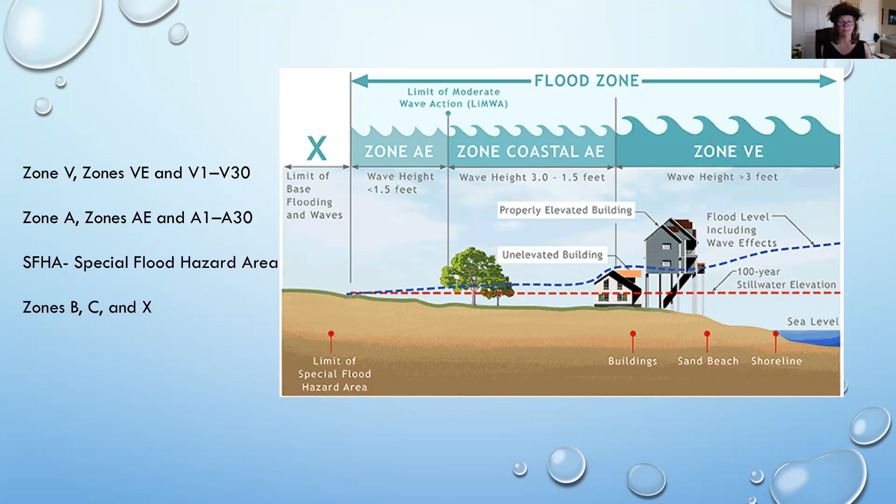So the flood insurance study is rather confusing. So they come into the community, and this is FEMA coming in, and they work with the local government, and they determine what flood hazards are for an area. They do an engineering study, and the FIS study shows the shallow flood areas, the flood hazard areas along the rivers, streams, coasts, and lakes.

It's based on a different amount of information, and that includes historic information such as the river flow, the storm tide, and the rainfall data. It includes meteorological data, topographic data, hydrologic data, hydraulic data. Hydrologic data is the actual stream flow. Hydraulic is how high it gets. It looks at the open space conditions, how the water flows across open areas, any flood control works like levees, and of course the development in the area.

And so of course this has to be updated over time. The results are shown on the FEMA flood map called the Flood Insurance Rate Maps, or FIRMs. And the FIRMs are available through the FEMA web service.

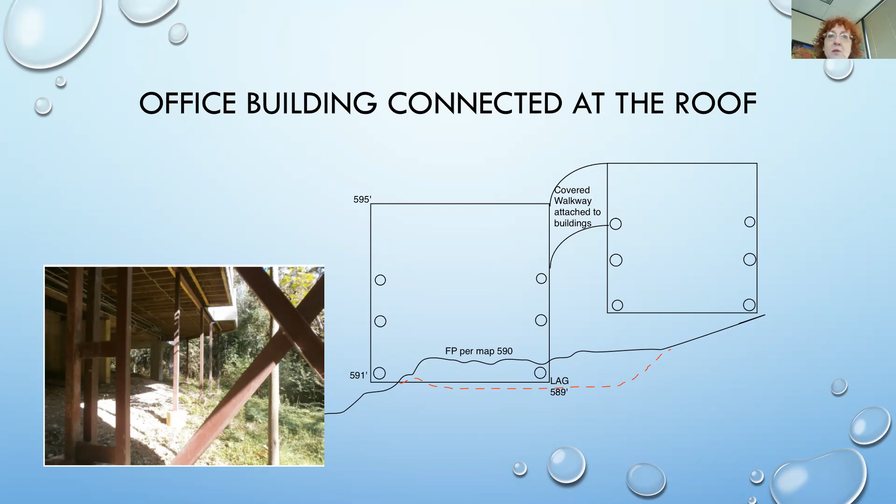So the NFIP originally started out with the Flood Disaster Protection Act of 1973, and then the NFIP came in 94. It mandates that federally regulated, supervised, or insured financial institutions and federal agency lenders must require flood insurance for buildings located in a participating NFIP community and in an SFHA, which is the Special Flood Hazard Area. Some of them may still require flood insurance outside of the Special Flood Hazard Area just for their own risk management.

So which types of buildings may be insured against flood loss? It can be written on any building that is eligible for coverage with 2 or more rigid outside walls and a fully secured roof.

And so the buildings have to resist flotation, so they probably need to be on a slab or on pier and beam. They need to be resistant to collapse and lateral movement. Manufactured homes, even travel trailers without wheels, can also be covered as long as they are on an FHA approved permanent foundation.

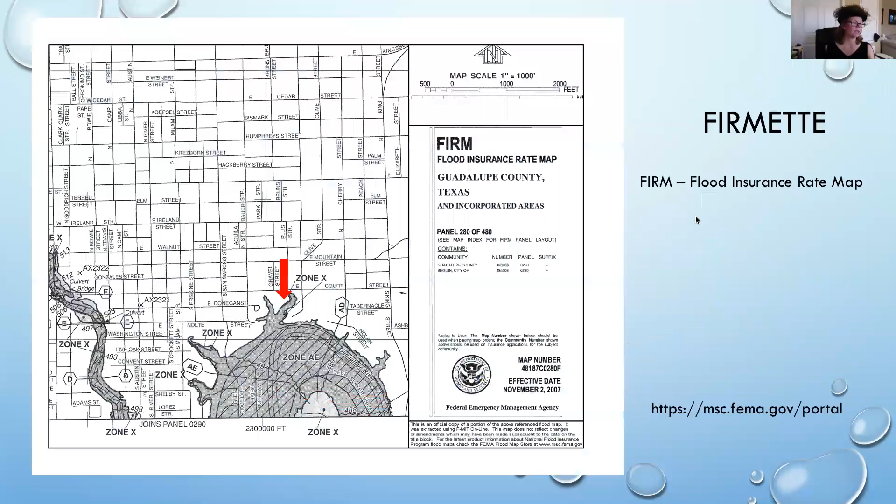So back to our building, we immediately filed for a letter of map amendment, the LOMA. On a LOMA, there's no filing fee, and it takes between 45-60 days for your determination. When I had called FEMA, the intake assistant asked for the number in B9, this number right here, the 490.5. And then he asked for the number in C2A, the 505.30. And he said, okay, piece of cake. It's 15 feet above the floodplain. No problem.

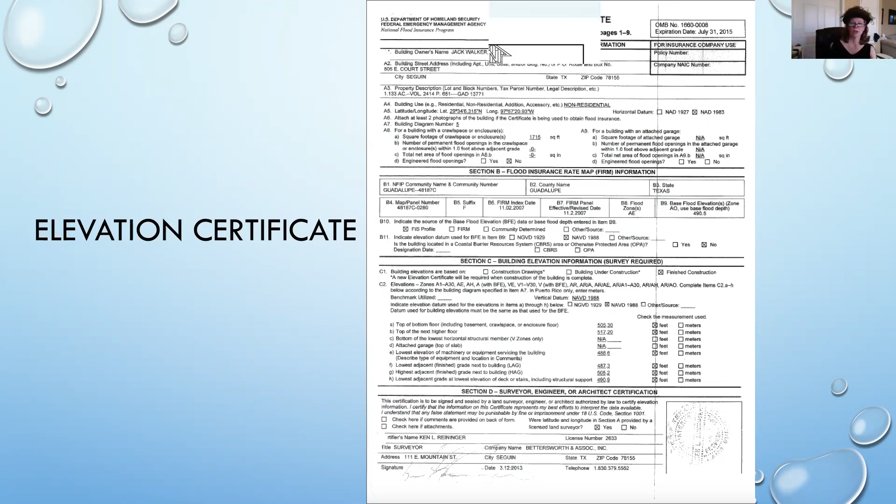So I was planning to file the letter of map amendment. A letter of map amendment is when the applicant and insured believes that the requirement to purchase flood insurance was made in error, and there is evidence that the building is not in the special flood hazard area on the effective flood insurance rate map, the applicant may apply for a letter of map amendment. Then there would be no flood insurance requirement. And in my case, my client wanted to avoid the flood zone stigma on his building.

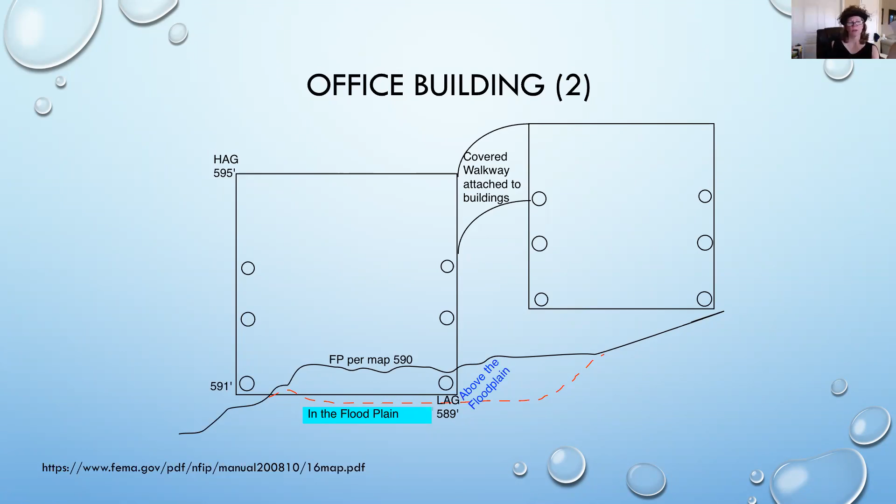Peggy, I'm going to pop in with a question or two. So you said that you had to send all of this information to Virginia. There are no state offices for this? It all has to go to the national FEMA office in Virginia? That's correct, because that's where the mapping office is, and all of these are asking them to change their mapping. How long did it take them to review your application? They were right at just under 60 days.

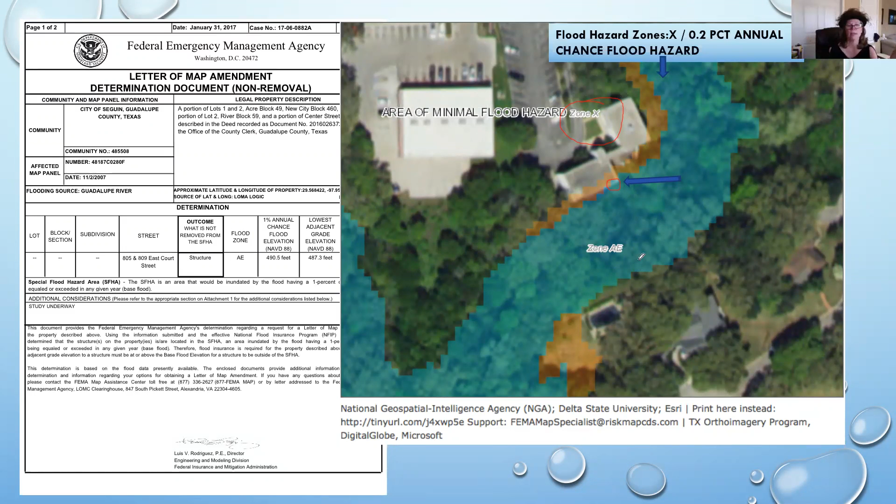It's actually, I'm sorry, LOMR F. So the LOMA is basically your application for a map change stating that the existing structure just simply is not in the floodplain. The CLOMA is your application for change based on the building that is going to be built, so it's conditional. It's going to be built and it's not in the floodplain.

The LOMR F says that it has been elevated by fill and it is not in the floodplain. And then the conditional LOMR F means that the building is going to be built with fill and is not going to be in the floodplain.

So what are we going to do about this? This is basically the FEMA map now showing this property, and they show our LOMA application right here. And with further research, you would find that determination letter telling us that there is no change, that it is clearly in the floodplain.

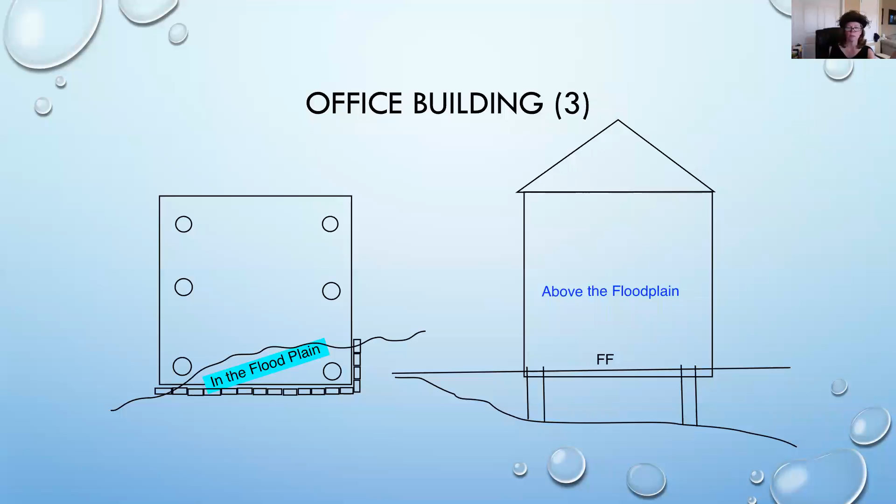Just to go over these again, the LOMC is the letter that reflects an official revision, and there are different types of LOMCs. So there's the letter of map amendment. It's issued when the scale of the FIRM does not allow for the small areas of naturally high ground to be shown outside of the special flood hazard area. So in other words, FEMA got it wrong. They did not account for variations in topography and that the building was not actually in the floodplain.

The conditional letter of map amendment means that it's not going to be elevated by fill, but that after construction, it still would not be in the base flood elevation area, so it would not be in the floodplain. Then there's the letter of map revision based on fill. And this is similar to the LOMA, but instead of it being based on natural ground elevations, the property or structure has been elevated by fill in order to elevate it above the base flood elevation.

Then the conditional letter of map revision based on fill is a comment letter from FEMA stating that the parcel of land or proposed structure that will be elevated by fill and upon construction would not be in the BFE. And so the parcel, or the proposed structure, is going to be built outside of that. And then there's the LOMA, which I just went over, and then a conditional letter of map revision, the CLOMR. So just remember, conditional means it's going to be built, and the F means that it's got filled.

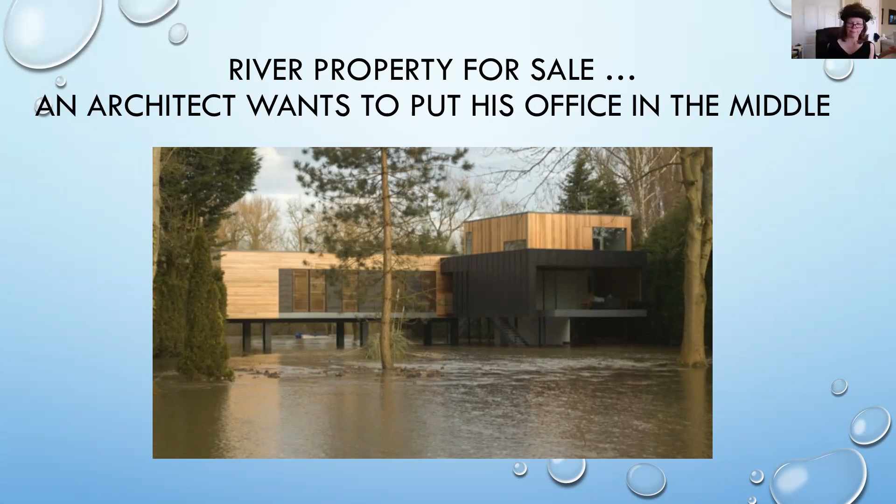So when I was learning about this, it's called the big elephant in the room, and it kind of stuck with me because this is very complicated. This diagram is used to illustrate the proposed structure, this building over here, to be built above the flood elevation. Each pillar is going to have to be measured to the direction of the water flow for the total square foot obstruction in the flow path of the flood event.

And FEMA requires a buffer of 1 foot above for the effects to downstream flooding. So if they say that the base flood elevation is, say, 600, you're going to have to go to 601. It must be 1 foot above, and the reason why is because if the water got squeezed up, it would have to show that it could go at least 1 foot above the base flood elevation for them to approve the application. Now, where did they get the 1 foot? That's kind of been one of my questions. It's not exactly arbitrary, but that's where they have determined is the safest zone for new structures.

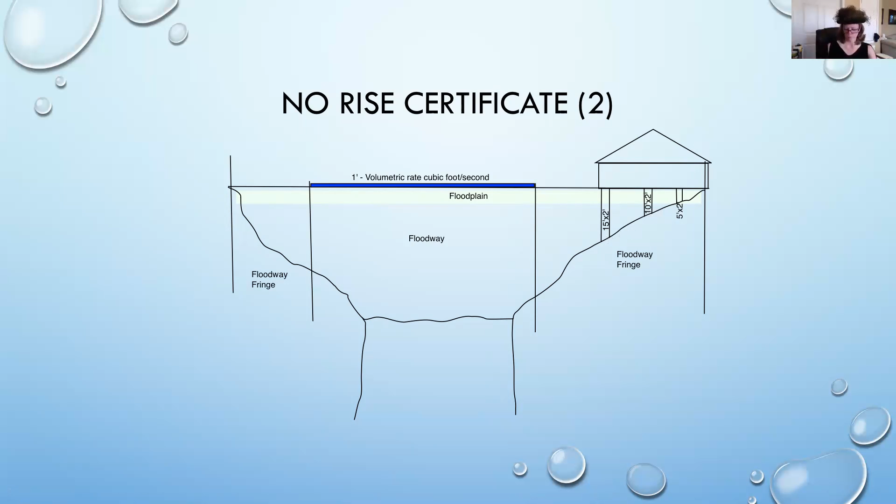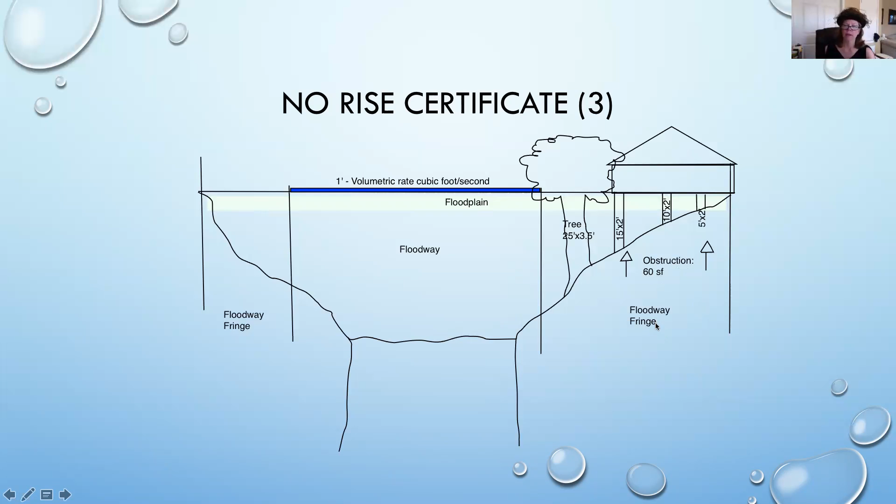So now imagine that there is a naturally occurring obstruction, such as a tree or multiple trees, that are also in the floodway or the floodway fringe. In order to receive the no-rise certificate, FEMA requires mitigation of the increase in obstruction to the water flow during the flood event. In our case, our obstruction takes up 60 square feet. They're in the floodway fringe, so not in the floodway, but in the potential for where flooding could occur. And for purposes of our demonstration, the tree is 25 feet tall by 3.5 feet in diameter, so it is a total of 87.5 square feet.

And just so that y'all have some definitions, BFE again is base flood elevation. The finished floor level is the top of the bottom floor, and that's often on diagrams as FF or FFL. And FEMA requires the base flood elevation plus 1 foot to the finished floor level. Going to go back to this.

Okay, so what they're saying is that if we are going to build these pilings and create an obstruction to the water flow, something else must be removed that was already there inhibiting water flow. So the tree could be cut down, and that would mitigate the new obstruction from the pilings on the building. I guess that can happen anywhere but Austin. And I don't know what you would take out if you can't take out a tree, but there could be other things already there that could be removed and offset the new pilings. If you don't receive the no-rise certificate, I think you're going to have real problems building, because you won't be able to get your permit.

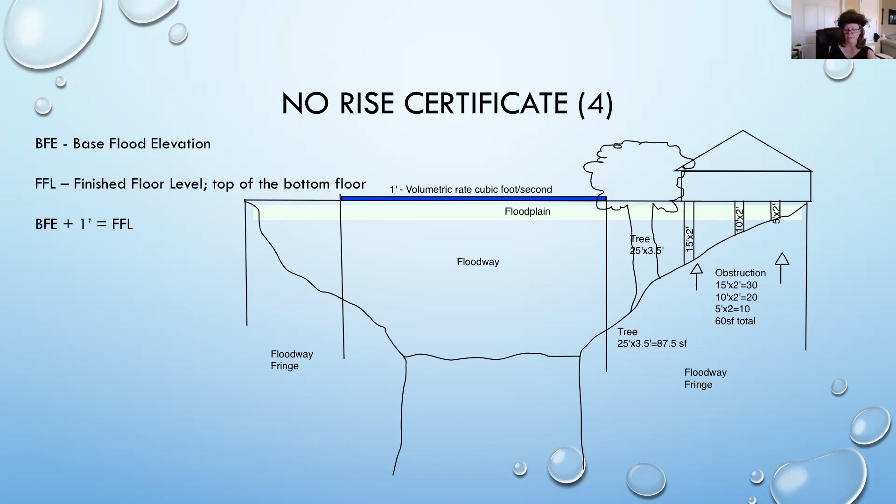So on the flood study methods, this came about when we were talking about a developer who wanted to build a subdivision, and part of the tract was mapped to be in the floodplain. During his due diligence on his contract, the developer believed the map might have been in error. The portion of the FEMA maps in the floodplain seemed incorrect, but he couldn't prove it. That would mean if he built houses in the floodplain, he couldn't sell them, because the new owner would have to get flood insurance to buy them.

So these areas are really just determined by using statistical analysis and records of river flow, storm tides, erosion, wave heights, and rainfall, and other information that they've obtained through consultation with the community, including floodplain topographic surveys and other types of coastal hydrologic and hydraulic analysis. However, on a smaller lot, they could be off by a few feet, which would mean the difference between being able to develop the land and not.

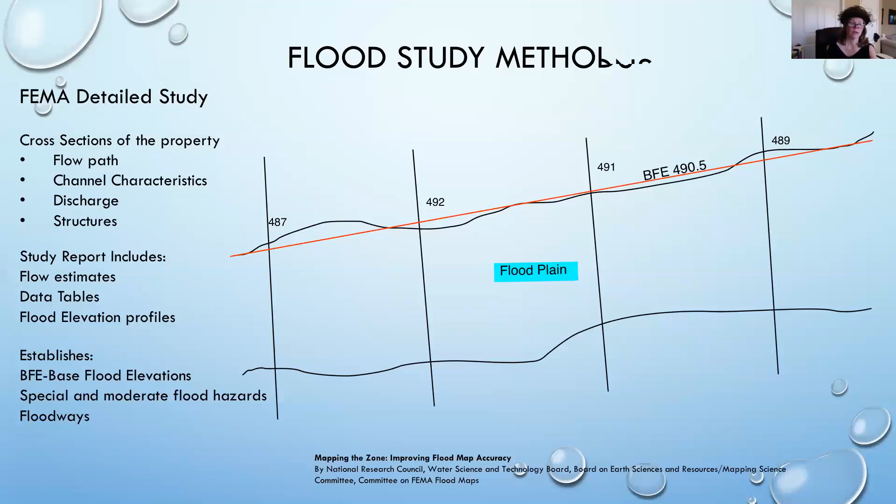So basically one other point that I was going to make. The reason you would do this detailed study is your intent is actually to move the floodplain and to have it permanently out of your way. And the only other two things that I'm going to go over are structural modifications to buildings that people may not realize are out there. If the building is already in the flood zone, you can make certain modifications to remediate the risk of flooding the structure. So I don't know if Smart Vent is the only company out there, but this happens to be one of them. And once they're installed, they prevent hydrostatic pressure buildup that causes walls to cave in whenever there's a flood event. And this is referred to as wet flood proofing.

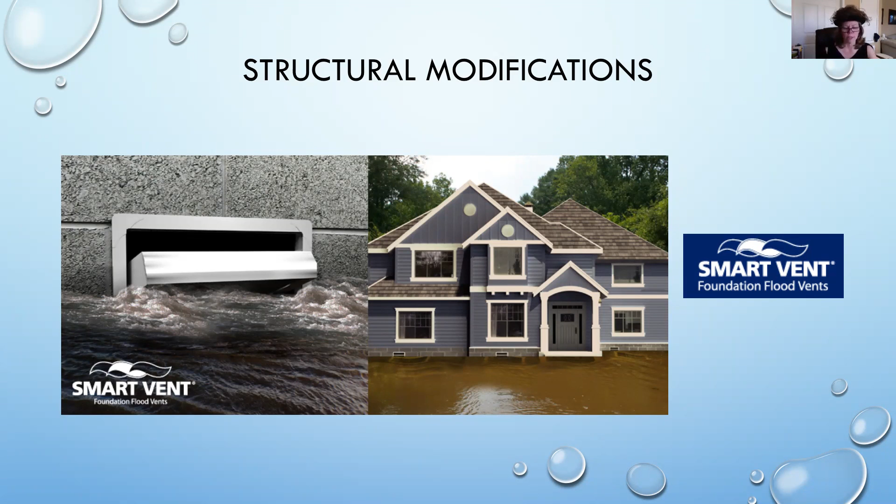And the way they fit together, you can put these in place rather quickly and prevent the floodwater from penetrating into the building. And the only other one that I thought was pretty interesting was a permanent flood door. So it's just like a commercial glass door, except that it serves as both the flood protection barrier and it's a regular pedestrian door, so people can walk through it. You lock it just like a commercial door. And that way you prevent water from penetrating.

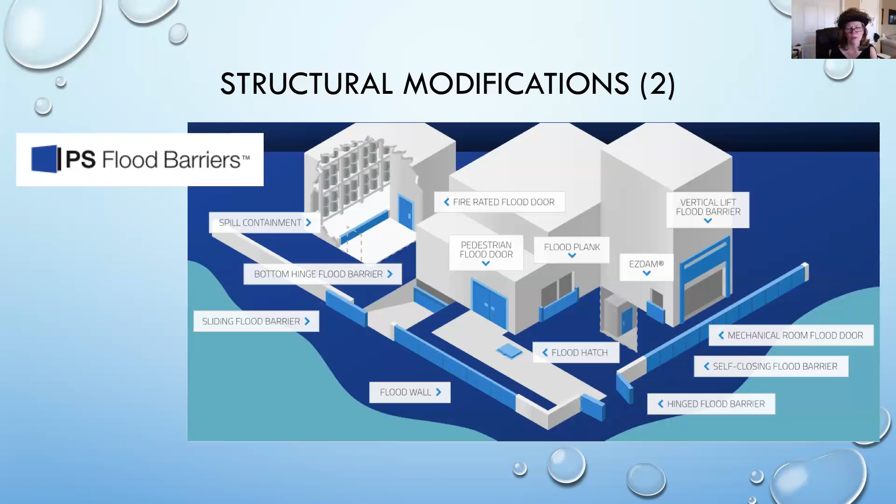And that is the end of the presentation. Are there any questions? I do have one here that asks, how often are the FEMA flood maps revised? Do you know? I don't know. I think that's going to be a community issue. So once the community joins the NFIP, I think if there's changes, then they're the ones who are going to initiate response from FEMA. And of course, they're revised with every one of the LOMAs or CLOMAs that are filed in application.

Did you get an idea of whether or not filing a LOMA or one of the other requests to change the floodplain, whether having one rejected affected the likelihood that you could get it changed later, or do they seem to look at each request discretely? I believe they look at each one discretely. From what I found when I talked to them, somehow I wiggled my way through the intake person and straight to the guy in mapping.

And so in our case on the building where we filed the LOMA and it got rejected, I really don't have any fear from talking to him that if we end up doing the LOMA, that it would be rejected, because then we would have made a change. Okay. And basically they look at numbers. They look at two numbers: base flood elevation and lowest adjacent grade. Those are the only two you actually need to care about. So the one about where the base elevation of the bottom floor is, you actually don't need that for the building. That number only comes into effect when you're talking to the insurance agent.